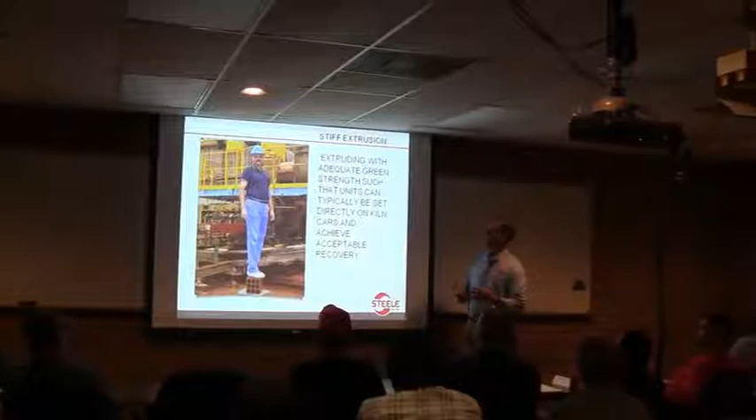So now, what are we doing? Really what Steele is known for is stiff extrusion. Let's talk about what that means. What we want to do is extrude a unit stiff enough that it has green strength, so we can set those brick directly on a kiln car. I want you to know the difference.

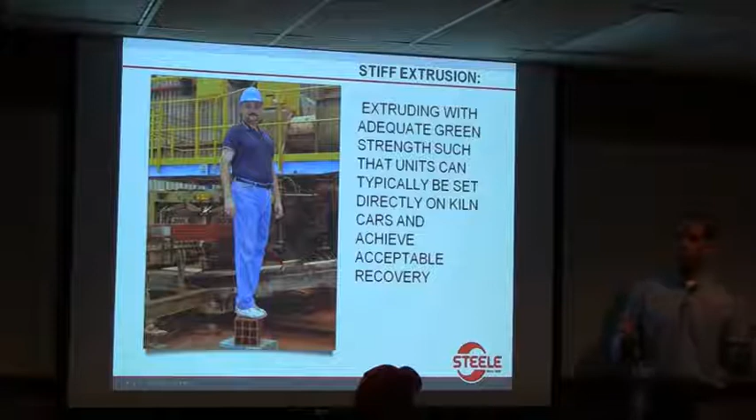Here's what it is: most of the plants in the U.S. and Australia are set up so you extrude a brick stiff enough that the units are strong enough to set directly on a kiln car, and you don't have to touch those brick again until they come out of the kiln and you're ready to package them.

Now let's talk about the other side. When we were talking about Sealy or the San Felipe plant, we're extruding softer—more water in the body—so those brick go onto rack cars and into rack dryers. They're not strong enough when extruded to set directly on a kiln car. So you don't stack them; you dry those brick first, get them dry, bring them back out, handle them a second time, and then stack them on a kiln car.

So our philosophy has always been, and it's been adopted by American and Australian brick manufacturers, that if the material will let you do it, stiff extrusion is the most efficient way to make a brick. We make a machine strong enough to let you do that—you've got to have power behind the machine to be able to do it.

This picture is a good illustration. This guy is about my size. That's from a customer in Saudi Arabia, and you can see the unit they're running—they're running a hollow block. That's how strong that block is right off the extruder. It's strong enough to hold him up.

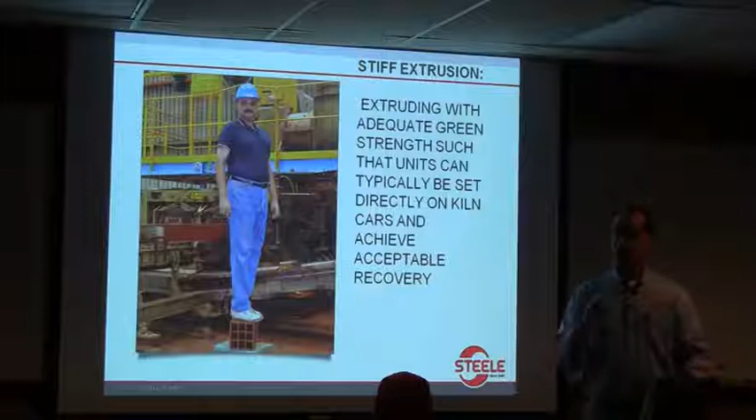As an extruder operator, in some ways you're operating a fine line. What we want to do is keep that brick stiff enough that it holds up on the kiln car and we're not cracking that bottom course. So we want it stiff enough. But on the other end, you don't want to get it so stiff in the brick machine that you're overamping the machine and locking everything up. There's a happy medium in running a brick machine—you don't want to be too soft, but you've got to watch how stiff you're getting it. So the extruder operator is trying to make sure the right amount of water is getting into that brick mix, and we're going to talk about that process.

But that's fundamentally what we're wanting to do at the extruder, and we'll talk about different aspects of that through the rest of the morning. This is simple—I always think of three things I want you to consider in the manufacturing process, because I really think you need all three.

One, you need the right machinery. If you don't have the right machinery, you're going to have problems from the beginning. But the second thing is you really need well-trained supervisors and operators.

If you've got folks that don't really know how to use what they've got, that's a problem too. I had an email from one of my guys last night. We've been working with a customer in another part of the country to solve a problem — they have variable frequency drives on their extruder, and nobody in the plant knew how to use them. So they had the right tools, just didn't have anybody there that really knew how to operate them. We'll talk about that later this morning too.

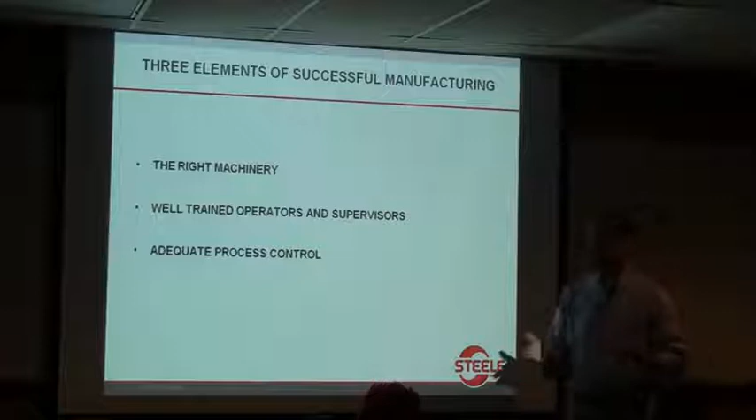And then the last thing is adequate process control. You've got to be able to control your process, and a lot of what we're going to talk about this morning is eliminating variables. If we can take variables out of the process, then there are fewer and fewer things that we have to worry about. That's kind of the way we're going to approach this.

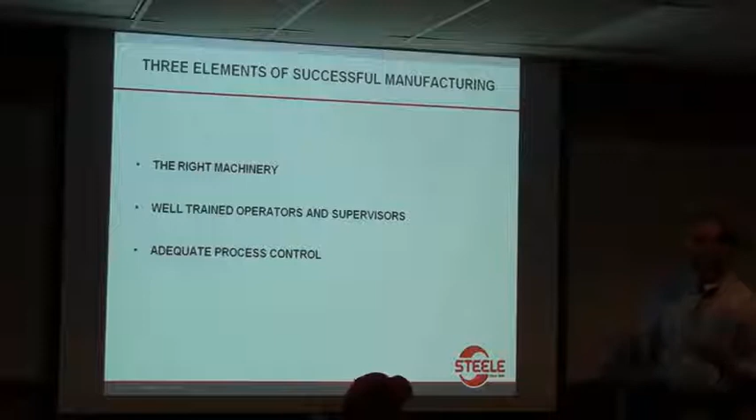I think on the next slide I've got an outline. Yeah, so this is roughly what we're going to go through this morning. I don't know about you, but I'm typically good for about an hour or so of seat time. So we'll get to a point here, and we'll take a quick break, just 10 minutes to get up and stretch. We'll go about an hour into this, take a break and stretch, then we'll come back in and kind of see if we can do the rest of the morning.

I won't read through all of those, but we're really going to step through each one. Probably on the front end we'll cover less, and as we get into the back end of the presentation we'll spend more time, because those are things you can impact in the plant and in running a brick machine. But there's our basic outline.

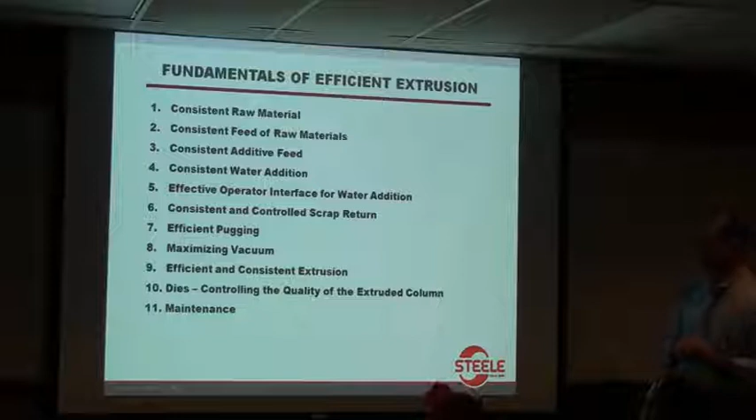All right, so this one we're going to talk just a little bit about raw material. You know how a brick plant works, right? The guys in the mill room say, well, if the raw material's not right, I can't do anything with it. And the kiln supervisor says, well, if you didn't make them right, I can't do anything with them. So it takes everybody doing their job — everything really needs to work throughout the whole process.

Clemson does a lot of research and teaches classes similar to this, and I'll tell you what they say — as a general rule of thumb, you need a third sand, a third silt, and a third clay. That's a general rule of thumb; you don't have to have exactly a third clay. Raw materials are going to vary a little bit. I think we were in a plant yesterday, and they said they were running about 21% clay, and some plants might run twice that.

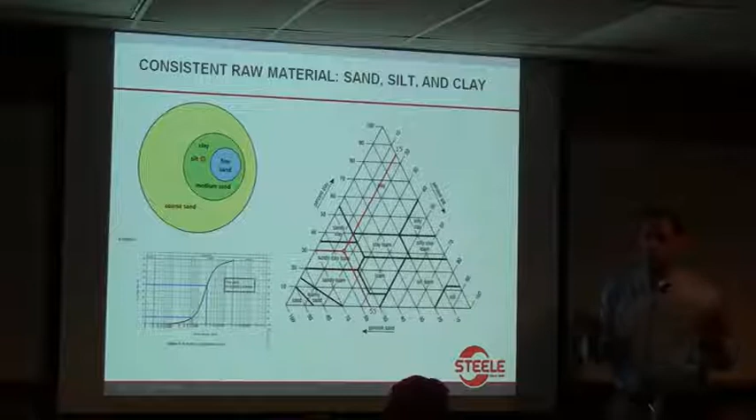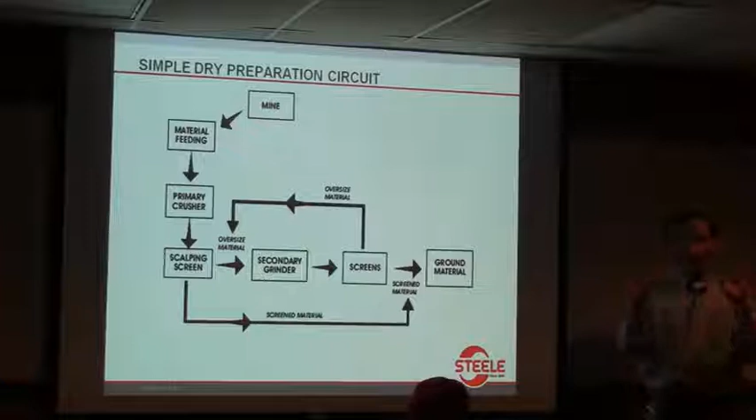Dry preparation is really when we talk about screening raw material. So what passes through the screens is what we're going to use to make a brick. In Sealy, you've got a smooth roll crusher, and the gap between those two rolls determines the size of the clay that's going to eventually go to the brick machine. So it's just done a little bit different.

Where you've got a typically dry raw material, screening the material makes sense, and in 90+% of brick plants in the U.S., that's what you're going to see.

So let's say we go through the primary crusher. A lot of times you've got a scalping screen to where we're going to pull out some fine material up front. What doesn't pass through the scalping screen would go through a secondary grinder, and that may be a hammer mill or an impactor. I know we've got a hammer mill over here across the street at the Denton plant. It goes across the screen bank, and then what doesn't pass through the screens comes back around and gets passed through that hammer mill or secondary grinder a second time.

Here's what I want to tell you, especially if you're in maintenance or looking after grinding: this is a system, and a system needs to be balanced, so everything needs to work together. I'll tell you the number one sin out of grinding rooms. I ran a brick plant before going to work for Steele, and one of the things I'd do different if I had it to do over is I'd really look at this oversized material that's coming back off my screen bank and going back into my secondary grinder or hammer mill again.

Here's why. If you don't have adequate screens, you've got a lot of fine material in this recirculating load, and that's a bad thing for two reasons. One, it's free—you've already put the work in to grind it, you're just not getting it out with your screens. So that system's out of balance for one reason or another. Not only is that free material you've already paid for, but when those fines come back around into that secondary grinder again, that's what really generates the wear and wears out everything inside on your wear parts.

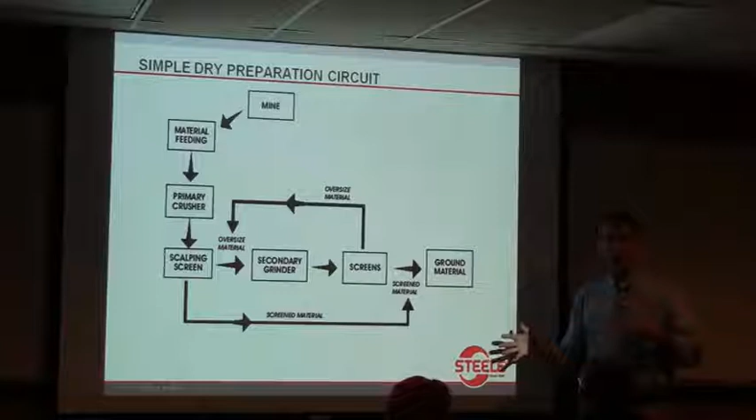So not only have you already paid for it once, it's costing you money to get it out. If there's one thing I would remind everybody, it's to take a sample off of your screen bank and see what's not passing through those screens. Are you getting all of those fines out? We had an engineer who used to say it ought to be 10% or less if you're really doing a good job. It's interesting—we had a customer in South America questioning us, and that's exactly what was happening. The machinery was doing its job, they just didn't have adequate screening to get those fines out of that circuit. Okay, simple point.

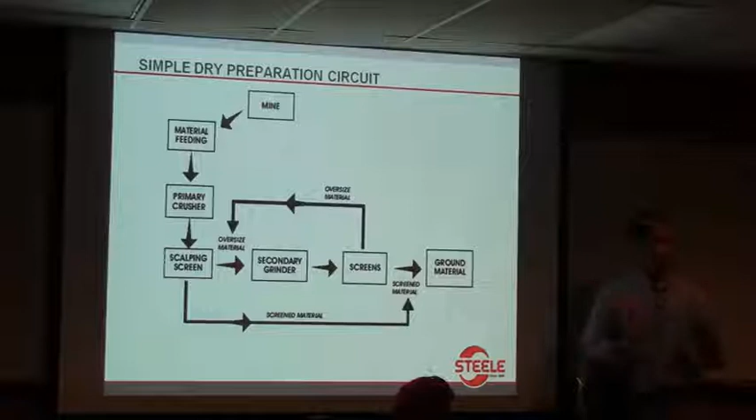Now let's roll on and we'll start talking about making a brick machine. So just in summary, we've talked about a consistent particle size distribution, and then we talked about sand, silt, and clay—we need all of those. And then the last one is a consistent moisture content.

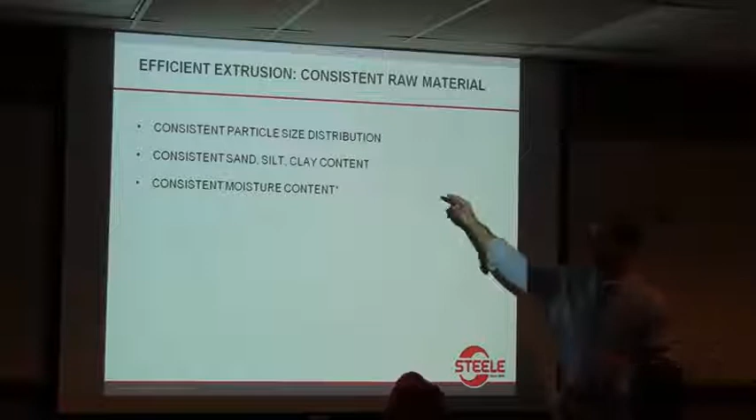Now then, here's the way I look at it. I know a lot of what goes on here is evaluating raw materials and quality control and putting up a stockpile. When you're stockpiling raw material—and Jim could add to this—I think you're trying to do two things. We really would like that raw material to be consistent, so we're putting it down in layers, cutting up through it with a front end loader or an excavator, so we should get a consistent blend.

But the second thing we're doing is really, you should be putting those stockpiles up when it's really dry. What we don't want to be doing is when it gets wet in the winter, having to fool around with wet material. That's how we can kind of ensure having something we can work with.

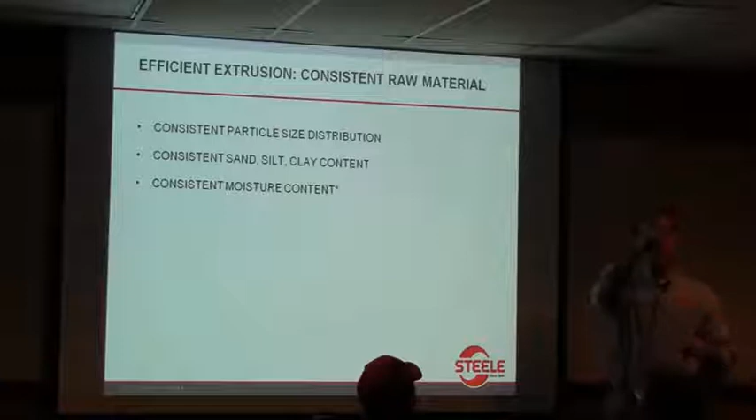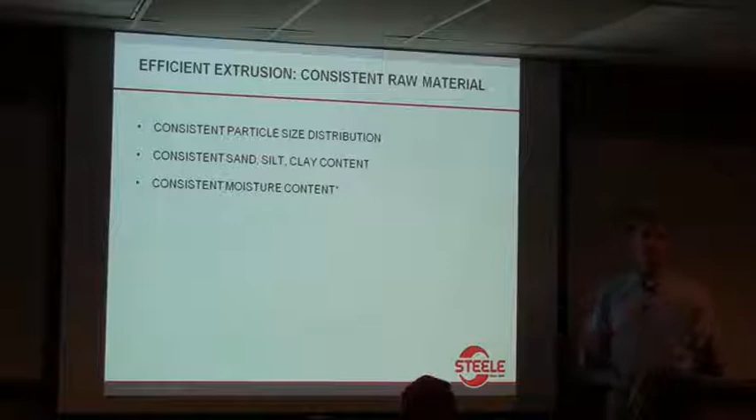And what we'd really like to have is a relatively consistent moisture content going to the brick machine. I think an operator can deal with some process variation, but what we don't want it to do is yo-yo up and down. We can handle subtle changes and respond to those, but if you've got wild variations, it's going to be a lot harder for an operator to maintain that consistent extruded moisture content.

Now then, consistent raw material and additive feed. And what did somebody say one time? If you really want something done, you've got to make it easy. I thought this was a pretty good illustration.

It's really simple, but I use this as an illustration. Before I got to the plant in Bessemer, we ran out of our grinding room into four clay tanks. At one time, if you wanted to change the feed rate out of the tanks, you had to trot down the hill and crank a hand gate open or closed, then go back up and see if you got it right. The plant manager before I got there put little rheostats and variable speed drives on there to speed up and slow down the belts pulling out of those tanks, making it really simple to control the raw material. But regardless, how about this?

Here's what I want you to know about a brick machine: what goes in is going to come out. You don't really accumulate it, it doesn't get stored anywhere. What goes in is going to come out, or it's going to get stuck in the middle and you'll be down for a big part of the day, and we don't want that to happen. So you've got to be able to control the amount of material going into that machine. We want it to be consistent and controllable for the operator.

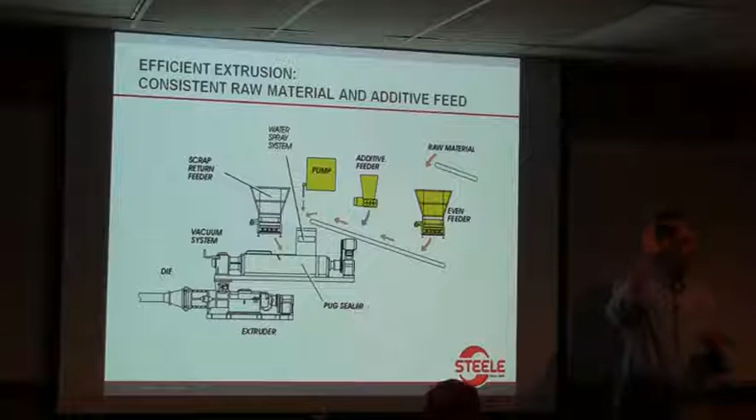The second thing I'm going to remind you of is if you are putting in an additive. Does anybody use additive A? Does that ring a bell? So if your plants are using additive A, that could even be if you're running an admix body, you could be putting manganese into a body. I know here at Denton, and maybe at Elgin too, you're making some commercial brick.

Well, let's think about that. We really ought to be putting that, whatever it is, in some relation to the amount of clay running through that body, and or the amount of clay running through that brick machine.

So if you're pumping in additive A, and you go to a product change, maybe from a king size to modulars - anybody run modulars out here? King size may run different from modulars, and Western Kings may run different from a utility. But if that extrusion rate changes, you need to go back and look at those additive addition rates and put those additives in proportion to the material running through that brick machine.

Now then, some plants have controls to where you can do that automatically, but it's simple enough. If it's additive A, you can run it into a 5-gallon or gallon container and see how long it takes. You can speed up and slow down that pump, but I want you to remember that you should be putting those things in proportion to the dry weight of material going into that brick machine. So if you're changing your extrusion rate for whatever reason, you really ought to be thinking about those additives as well, and you need some way to control them.

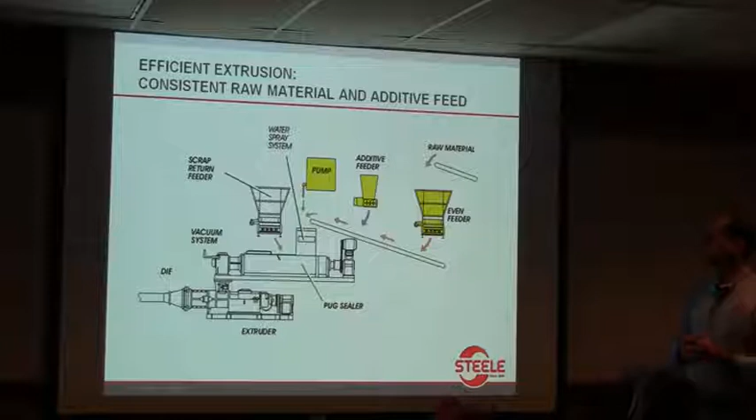Let's go to the... Yes, sir. Our QC guy is the one that adjusts additive A. He goes by the amount of cut that we get. If our cut rate is down, he'll adjust it accordingly, or if it goes up, he'll do it the same way.

Well, and that's a good point, let's talk about that. The cut rate should be okay if you're always running the same size product, because cut rate is really indicative of what's going in and what's coming out of the machine. So I would say if you're always running the same size product, going off the cut rate should be okay.

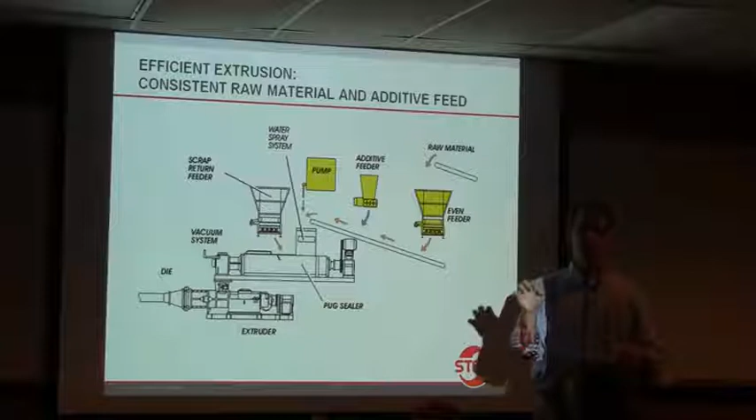But I would also say that if you're running 12 cuts a minute on a utility and you're running 12 cuts a minute on a modular brick, well, that's two different amounts of clay going through that brick machine. So it's not necessarily the same in that regard. I think he's pretty close, but you got to be careful to always think 12 cuts a minute on one size brick might not be the same as 12 cuts a minute on a different size.

We have a line that runs the modular, whereas the line that I'm used to running or working with is just commercial. It's different sizes and everything, and different caps on it, which causes how many cuts per minute you get. So he'll adjust it accordingly.

I think it's good that he's checking it, but I would also think really what it ought to tie back into is that dry feed rate going into the brick machine is going to be more accurate. But he's using cut rate as kind of a surrogate measure to figure out what's coming through. But I'm glad you shared that, and that's how they do it.

All right, good. All right, let's talk about water addition. This is kind of a sketch out of our recommended way to add water to a brick machine.

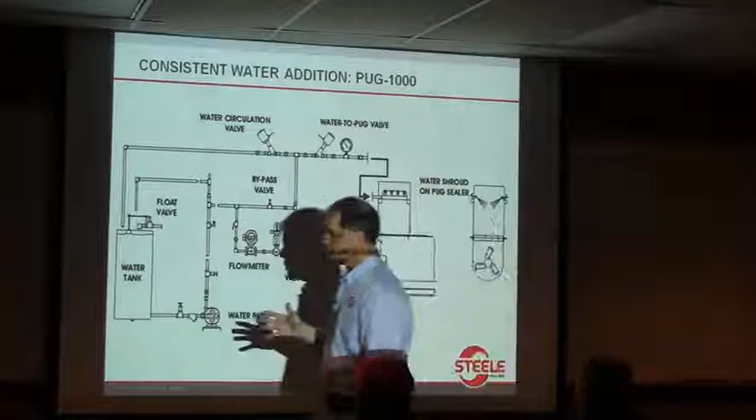So let's go back, and I want to explain how this works. Let's start with a water tank. You've got this water tank that's constantly being filled. You've got a water pump here. Water pump pumps water up, and overflow is going to come right back into the tank again.

And we're showing 2 air-actuated valves. Let's say that clutch is disengaged on the brick machine. This valve's closed, this one's open, so everything's just circulating back around. What we're also showing in here is a flow meter and a flow control valve.

There are lots of different ways to do this now. But really what this would do is, if you've got a flow meter and a flow control valve, an operator can say, I want to put in 10 gallons a minute. And that flow control valve will float in there until it dials in and lets you have exactly 10 gallons a minute. So the nice thing is you've got a relatively precise measure about how much water is going into the brick machine. Now, you don't necessarily have to do that.

All right, but let's talk about this. Once you engage the clutch on the brick machine, this valve is going to close, this valve is going to open, and so all your water is going to be flowing into the water shroud on the back of the machine. But let's go back here for a second. Why do we want to have a water tank?

True story, and I talked about learning things from customers and customers having problems. There was a brick plant in Atlanta, Georgia, and probably just like y'all, they'd start up at 6 o'clock in the morning. They'd get everything lined out and start setting brick, and it was not unusual that by 7 o'clock in the morning they'd either run the amps up and sheared a pin on the front of the brick machine, or had packed material into a die and were having to dig it out. Plant manager's thinking, well, he's going to get coffee and he isn't paying attention to what he's doing, a brick machine operator. But that wasn't the case. You know what was happening?

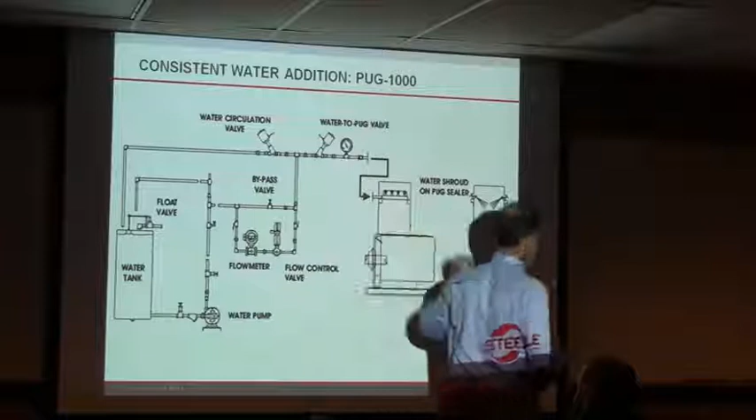Okay, so here's the other one. It's always nice to measure what you're doing. Let's go back on the other side. You see that pressure gauge right there? Not everybody uses that, but I'm going to give you a number where we'd like to see the water pressure in that line going to those spray nozzles: 40 psi. And why 40 psi?

Now let's think about what we're doing. In a short amount of time, we want to get a water particle in contact with a clay particle, and we want to do that job consistently. That's what we're doing in the pug mill, mixing water and clay and getting those two in contact with each other. We want to do the best job we can in that limited time between the material falling into the back of the pug sealer and the time it comes out front.

So one way we can do that is if we're running 40 psi, we get a good atomized spray back there, fine little water droplets. A lot of times, I go into brick plants and it looks like a little boy's peeing in the back of the tub. It may work, but that's not near as good. If you've got a good atomized spray, a good fine spray mist, and if you can keep 40 psi back here, then you can do it.

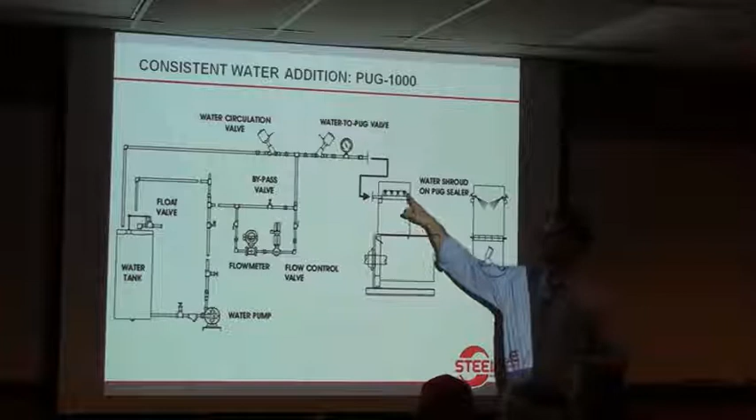Well, how do I do that? I might need to put in X amount of water—maybe 6 gallons a minute, maybe 14 gallons a minute. But what you can really do is change the spray nozzles in that water shroud. We've got half gallon, 1 gallon, 2 gallon, 4 gallon, 7 gallon a minute nozzles, and typically there are 8 of these valves back here. You've got a lot of control.

Let's say you get it set up and then it gets wet and you don't need to put in much water. As an operator, you can come back here, and what you should be able to do is cut off a couple of these and still put in the water you need, but keep that good atomized spray.

It's funny, my brother was the first one—he always said, read the book, and that's what the book says, 40 psi. It may be hard to do in practice, but that would be something to strive for: see if you can run that and get 40 psi as a back pressure on those spray nozzles with the water entering the water shroud.

I may have this in another slide, but I see it here, so I'll mention it. There's a little piece of angle iron back here at the back, and there's a reason it's there. For all the maintenance men, what we're trying to do is keep water off that back seal. That's a grease purge seal—when we grease it, we're purging grease into the tub, but what we're trying to do is keep dirt out. That little piece of angle iron back there is trying to keep dirt off that rear seal.

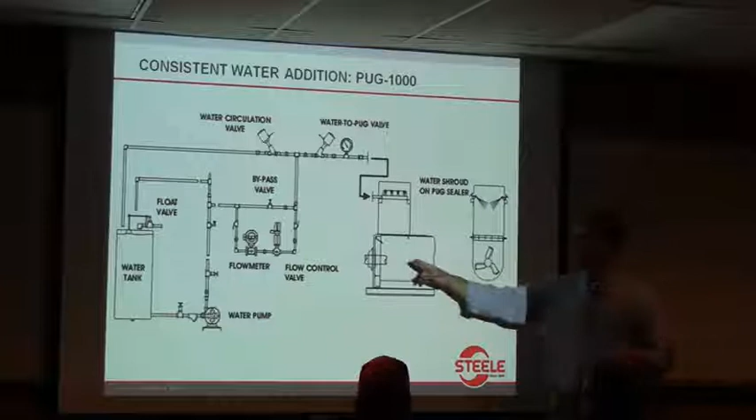If you ever go into a brick plant and it looks like a little mud volcano at the back of a pug tub, that's what's happened—you've either lost that rear seal or you haven't been greasing it, and water and mud are working their way out of that back seal. A lot of times maintenance guys think it just makes it harder to change that rear knife, which, by the way, wears faster than some others. We'll talk about the job of that rear knife in a bit, but there's a reason that angle iron's in there. A lot of times you'll see them cut out, but it's trying to keep dirt and water off that rear seal.

George, before you advance that, does anyone, I can't remember if any of the Acme plants, do you have any of the plants have pug masters or an automatic water control system? Okay, let's talk about that for a second.

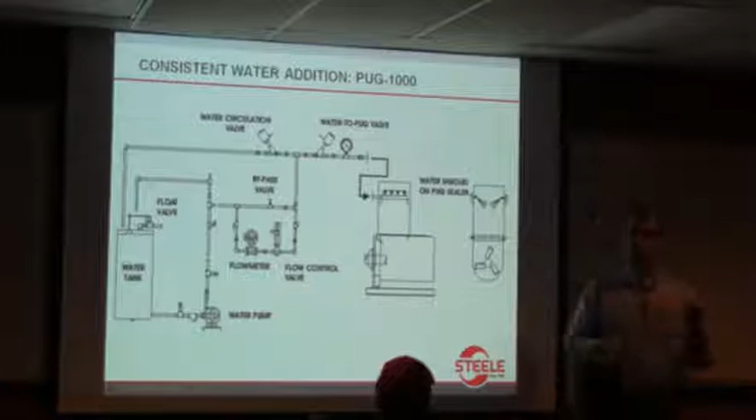So this is kind of a middle of the road system in a way. All it's doing is telling an operator, if you've got a flow control valve and a flow meter, exactly how many gallons a minute he's putting in. But he's got to figure out how many gallons an hour is right, and is my raw material changing, and how does all of that work?

The really nice systems today are automatic moisture control systems. How they work is you've got two things on the feed belt coming up to the brick machine: a moisture transmitter, which is reading the moisture content of the raw material, and a belt scale. Those systems do a calculation with a set point, figuring out the moisture content and dry feed rate, and they'll automatically control the valve to add the right amount of water at the right time as that material's falling in the back of the pug mill.

If everything works, the goal is, let's say I want to extrude a clay column at 17.5% moisture. You can set the system at 17.5, and even if the incoming moisture content or dry weight varies a little bit, that system automatically controls the water addition. Some folks have them and love them and run them in nothing but automatic. We'll go into some plants and they say, you know what, I just don't trust it, we've never been able to really get it to control right.

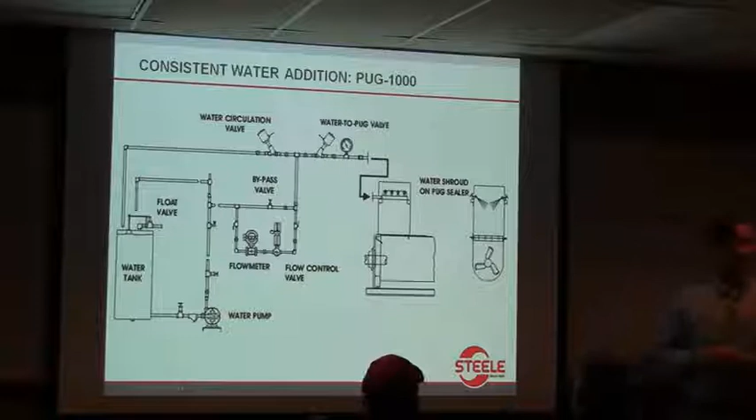But anyway, we'll leave it at that. Let's go to the next slide and see what we got on there.

So I did have one in there where we talked about that spray shield in the back. When we build a new machine, we've got a piece of skirt rubber on the front side of that water shroud. We talked about that atomized spray mist, and we want to keep that contained - we don't want it floating across the plant. There's a piece of skirt rubber there, but a lot of times you go into a brick plant and that's missing, you don't see it.

It's a small thing, but let's talk about right from wrong. You see that material falling into the back of the pug mill, and it's going to create a sheet. When we're setting up a new machine, we want to know which direction the material is coming in, because we want those spray nozzles hitting each side of the sheet - the big flat side, not the skinny piece - so we can maximize contact between the clay and the water particles.

Every now and then you'll see folks move a brick machine or move a water shroud from one machine to another, and that's not right. That's the way it ought to be, the way it's shown in the diagram here. Now I think I've got another slide.

We're going to talk about the optimal level of material in a pug tub. George, let's go to the next one.

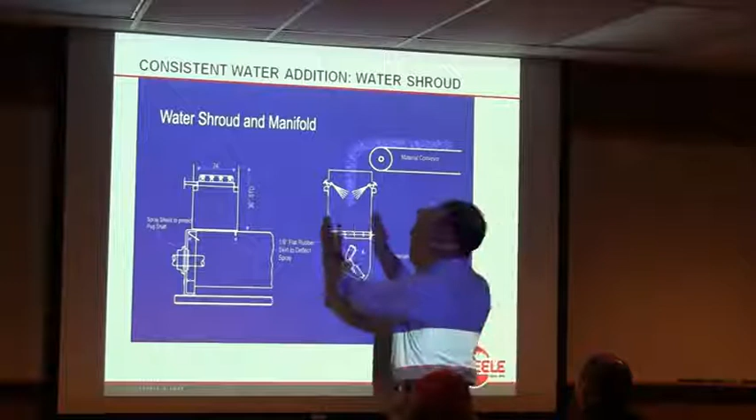Well, how about this? So what we've really got is there's a box on the back, and I think it's about 3 feet long, isn't that right, George? Typically what we're wanting to do is add all of that water at the back of the pug mill or the pug sealer, and then give it time. Let the knives and everything do its work to really pug that material, work that water and clay together, before it gets to the sealer auger.

Learning things from seeing people doing good things - one of the brick plants, we talked about this being the way it should work. Now we talked about getting in trouble or worried about it getting too dry on you and your amps going up. I saw one brick plant where they had literally a foot valve, and they had a spray bar across the length of the tub, running front to back.

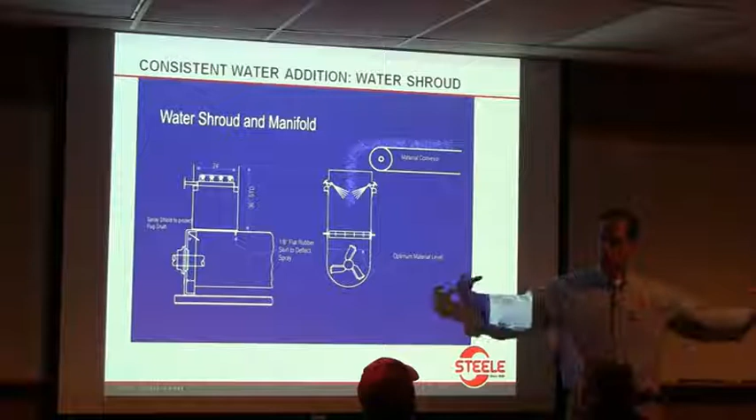So if the amps started going up, rather than taking a hose and wetting it down, they had a spray bar that ran the length of the tub, and he could hit that foot valve and automatically get water dumped across the length of the tub. I thought that was a really effective kind of emergency water addition. That was pretty nice. I trust you guys as operators to tell me whether that'd be good or bad. Normally what we want to do is get the water in early and let it work in, but when you're trying to keep material from getting too dry before it gets down to the extruder, I thought that was a pretty good way to put it in.

So how would that show in the finalized product? Would that start creating weird cracking? I don't know that it would. I don't know that it would. And it would be a hard one to diagnose.

Let me go to an extreme - if you're making tile, and you've got a dry particle in a floor tile or a roof tile, it'll create a flaw in it. Now making a face brick is typically a little bit more forgiving, but that's what can happen. They're more sensitive to those little dry particles when you're making something like a tile than necessarily a brick. But it might be hard to look back and say, okay, that's a crack or that's a flaw because I didn't get my water mixed in as well as I should.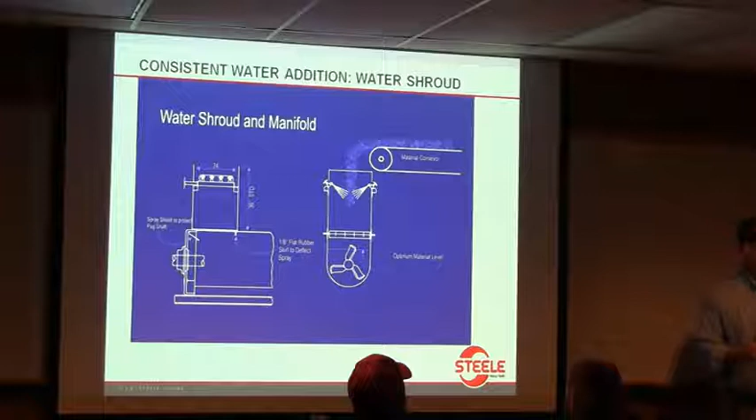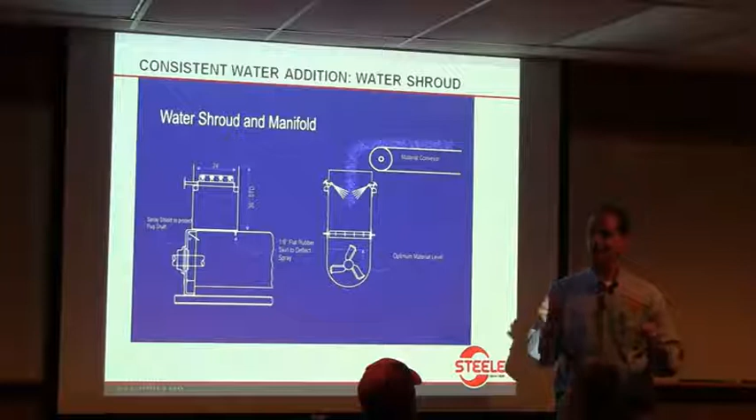Okay, let me mention something else. So I said to read the book, and here's the practical side too. If you have to start using those tiny little spray nozzles, down to a half gallon, those little orifices or holes get awful small. So if you get any trash in your water supply, you can plug those little nozzles up quicker. When you get into the bigger ones, like 4 gallons a minute, or 2, 4 or 7, that's not as much of an issue, but you can still clog those up with trash in the water. So I'll just tell you, there's the flip side of it. But we would like a good atomized spray.

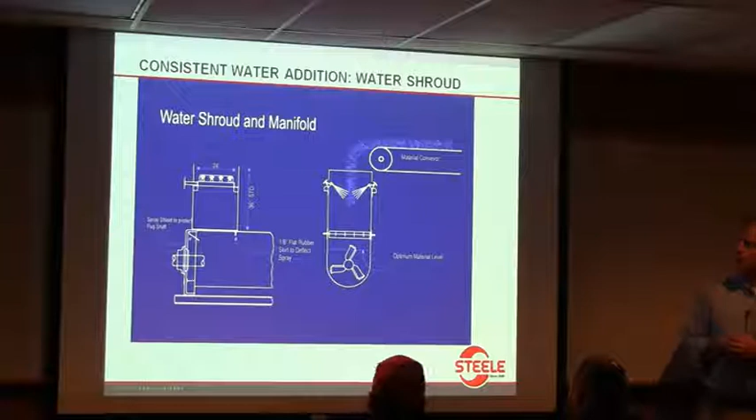All right, we're going to come back. Let's talk about scrap return, and this is a little tricky. Let me tell you what we like to see and like to do with scrap return. So I'll give this example. A lot of folks, let's just say you have scrap coming off of the setting machine or scrap circulating back around, and if you don't have a scrap return feeder, here's what happens. Let's see if we can use some simple numbers. See if you can follow me on this.

All right, let's just say we've got 50 tons an hour coming out of the front of the brick machine and everybody's happy. Maybe we're trimming off some waste there, doing a wire cut, and we've got the ends of the slug coming back around. Let's call that 5 tons an hour. So 45 tons an hour are going onto the kiln car and 5 tons an hour are circulating back around, and I've got 45 tons an hour coming up from my ground clay storage. So 5 tons recirculating, 45 tons coming up from ground clay storage, which is the same thing going onto the kiln car. So everything's balanced and everybody's happy, right?

Then I get a rock hung in a wire, and I've got 6 slugs on the belt before we realize it. The guys down at the setting machine wave their hand and flag it, so I walk down, take my screwdriver, and get it out. Now I've got 6 slugs on the belt. We're good brick makers, they're not going on the kiln car, so we're going to run them back around. So now then, if I don't make any other adjustments, rather than having 5 tons an hour coming back around, for a short window I've got 50 tons an hour of material coming back around on my return belt, and I've got 45 tons an hour coming up from the mill room. So rather than having just 50 tons an hour flowing through that brick machine, I've got about 95.

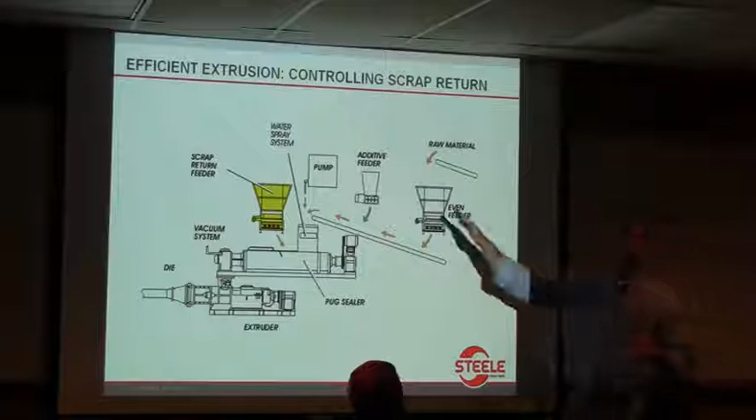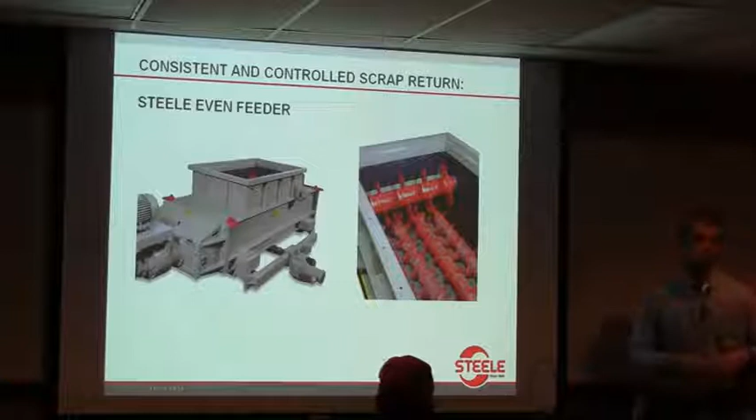I think I've got a slide in here - that's what we call an even feeder. You've got a live bottom feeder, which means you've got rotating shafts in the bottom, and a cross shaft up front to chop up those brick bats or pieces of slugs going back in, and just meter those back in. This one's even got a retractable floor in it, and some plants making commercial or architectural brick like those, because you can clean everything out - pull the floor back and clean everything out when you're done. But again, it's about controlling scrap. All right, let's go to the next one, George.

Okay, now then, we're working our way through. This is a good graphic, and one of those things I'd like you to remember today, if you don't remember anything else: there is a correct level in the pug sealer, all right? What we'd really like to see is that image shown on the left-hand side of that slide, where when that knife swings over to about 12 o'clock, we'd like to see about 4 inches of the top of that knife when it swings over. And we'd also like to see a good consistent level in that pug tub from the front to the back.

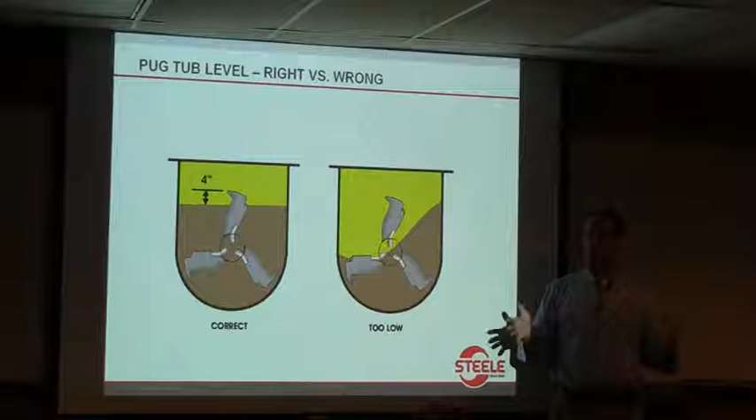Speed not too quick. Well, how about this - and you're close, I'll give you partial credit for that one. What really happens is that pug shaft - we could also say the pug shaft's turning too fast for the amount of material in it. I want to talk about variable speed drives a little bit and what they'd let you do. Maybe we talked about making different sizes, and if you always run your pug sealer at a consistent speed, you can't really change the speed of the pug shaft, and then we've got to change the amount of material coming into the brick machine because of how fast we can set brick on a kiln car. So we may not have any choice.

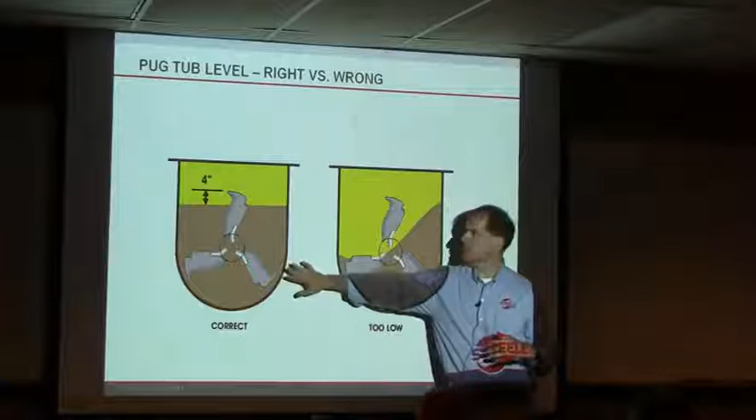But now you've got more and more plants putting in variable speed drives, and what that lets you do is speed up or slow down that pug shaft to where what we'd like to be able to see is that condition on the left-hand side all the time. And I would just tell you, if you always run like this, that's a problem - we don't really want to see a pug tub starved like that.

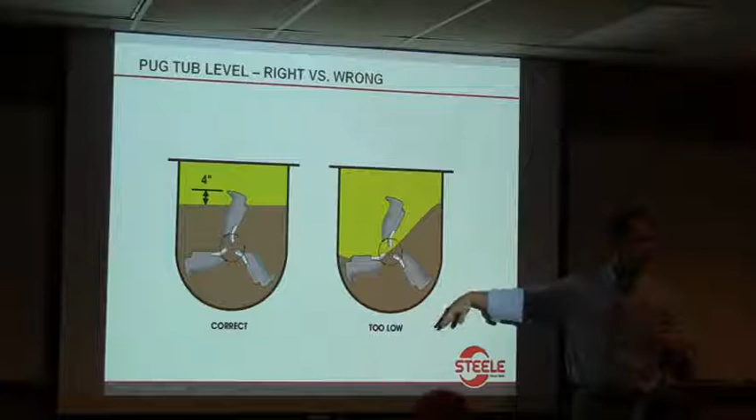We talked about mixing water and clay, and we'd like to take advantage of that residence time. When you have this much material in there, it's going to spend more time in there, and there's more opportunity for that to pug the water and clay together. But I'll also tell you, every now and then, if you run like this, you can actually lose your vacuum seal at the sealing augers. You can hear it - it almost sounds like a brick machine burping a little bit. It makes a bit of a noise, and to me, that's a hard problem to track down, because you're losing vacuum, and that impacts the quality of brick.

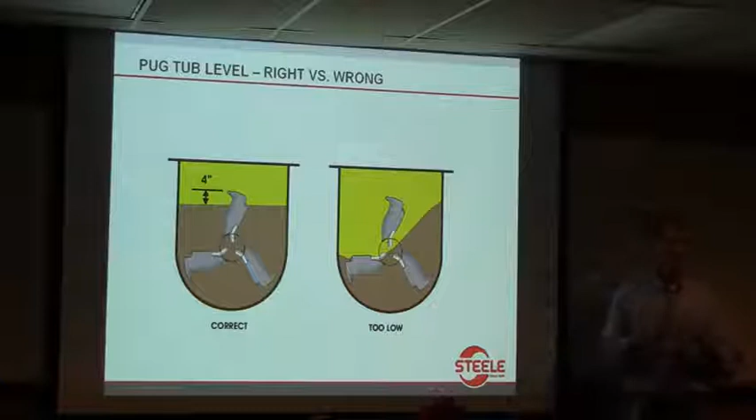But if you run it like this, it could come and go, and that's not what you want to do. We want to see that image over on the left-hand side.

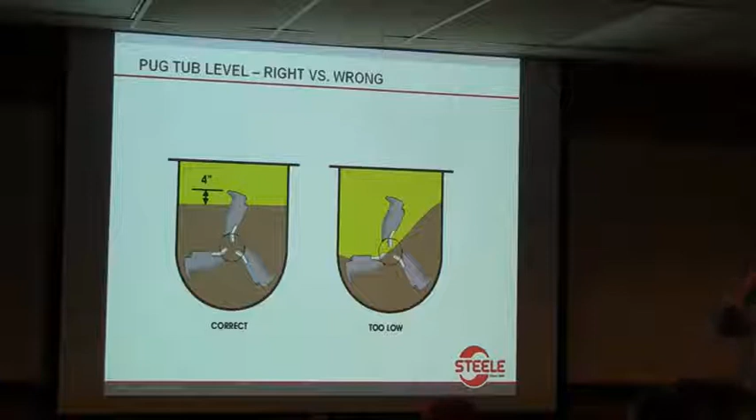Let's go to the next slide. I think I've got a shot out of a plant here. That's actually a good-looking pug tub, and my guess is that's an Acme plant. I think that picture was taken in an Acme plant.

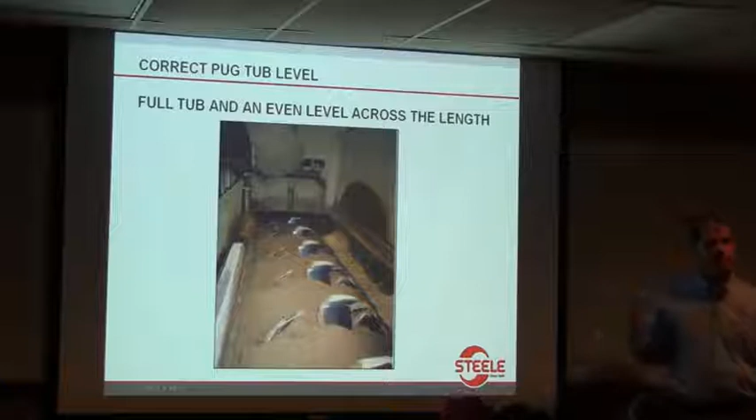But if you look at that, there are a couple things. You can see what it looks like as that knife is coming over at 12 o'clock. And then the other thing is the level of material through that pug tub is pretty level from the back all the way up to the front. That's a good thing too, and that's what we want to see.

It's interesting, single shaft pug mill, but I love walking in there, and you can literally at times see material just looking like it's walking its way up towards the front. When you got everything right, it works, and it works well.

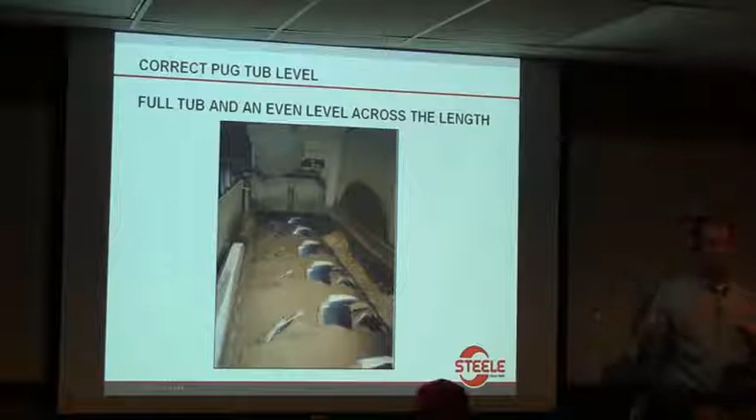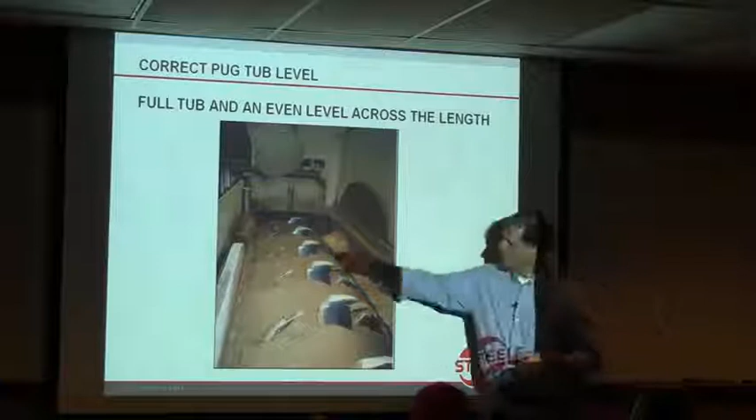For the maintenance guys, I don't know if you're responsible for changing pug knives or not, but let me tell you one thing. If you're changing pug knives and you're not going to change them all at the same time, what we encourage you to do is go in and change them in a row. Don't go into the back and change 12 in the back and then go to the middle section and change 12. It'll change the flow characteristics of the material in that pug tub.

What we'd really like to do is change them all in a row and then go change another row, and you can avoid having that problem. But that's a good looking pug tub, and that's what we would really like to be able to see in all your plants, okay?

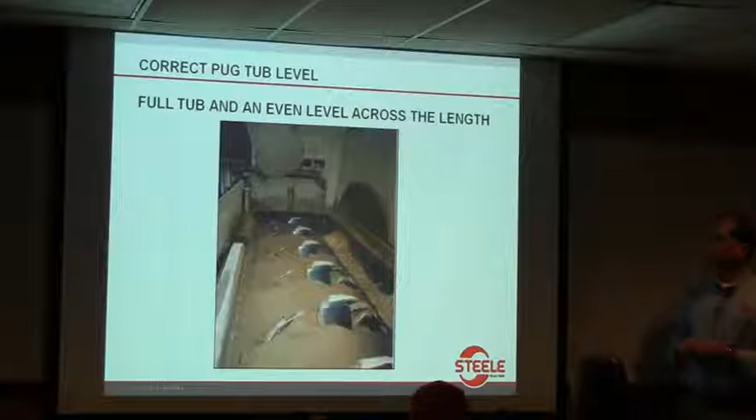All right, let's talk about installing a pug knife. This might be good for operators and the maintenance guys. I'll skip down. Well, let's talk about the pitch to begin with.

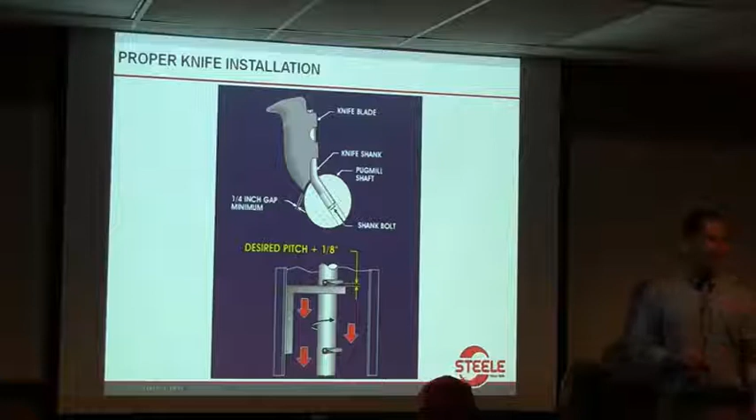And George, or anybody else, I don't know what you'd say - we'll say they are adjustable pitch. You could put more pitch on them to impact how that material flows through the pug tub. I think it's a tough way to do it, and I'd rather keep them relatively consistent unless you've got a compelling reason to change it. But a very subtle pitch on the pug knives to begin with.

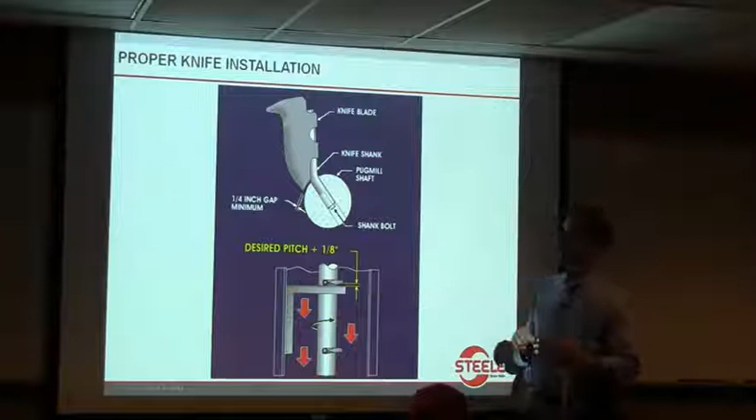The second thing that I want to talk about is when we put a pug knife in, we should have a 1/4 inch gap between the blade and the shaft. Okay, and here's the reason for that.

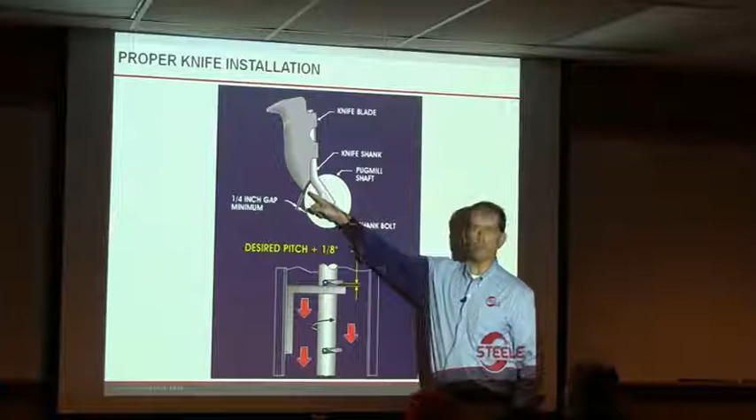If you set that blade all the way down on the pug shaft and you don't have that gap, and you tighten everything up, what we run the chance of doing is putting that shank in tension. And if we put that shank in tension, by the time it cycles in that tub enough, you could break one of those shanks. So you really want to wind up having just a little bit of a gap between the pug shaft and that blade in operation.

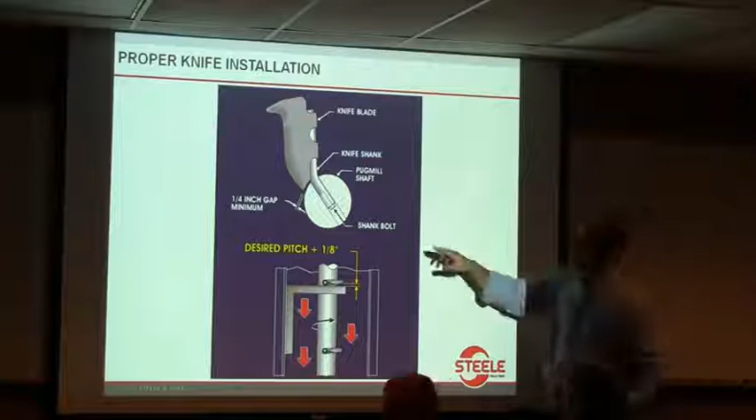Let's talk about, if you don't know, how those knives are actually held in. What's shown here is an aluminum bushing, a tapered aluminum bushing. And then what we've also got is a bolt that goes in the end and a washer underneath it. What happens is you tighten this bolt, you flare that aluminum bushing, and it locks everything together. So that's the way they're held in place.

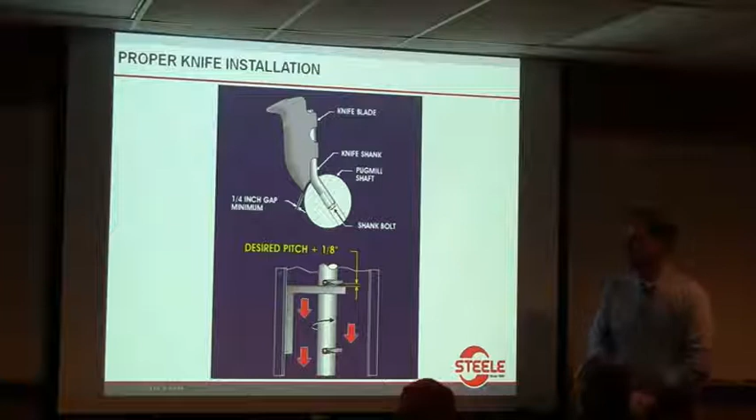Now then, I think let's go to the next slide. Let's see how my timing is here - yeah, not too bad. So now then, there are a couple things that I'll tell you. Let's talk about installation. If you ever have to replace a pug shank or put one in, there are a couple things I'll tell you.

Always put never-seize (anti-seize) on the shank itself, and between the shank and the aluminum bushing, put never-seize on them, okay?

I work for Steele, and I'll tell you what I think is probably one of the most hateful things about our machines: if you get a shank that's been in there for a while, they are not easy to get out. Honestly, even for us, we continue to look at better ways to be able to get those out. But it can be a bad job.

Let me tell you a couple things that may help you, in addition to always using anti-seize or never-seize when you're installing them and being generous doing it.

You remember we talked about that aluminum bushing, and that aluminum bushing locks the shank in place when it flares out. When we go to take one out, let's say we take that bolt out of the end, the last thing we want to do is hit on that aluminum bushing and flare it out. What we need to do is separate that shank from the aluminum bushing.

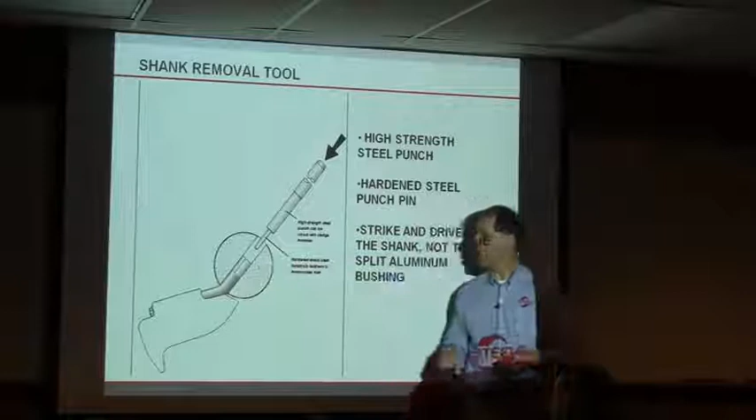So what we've got is a tool with a hardened punch pin that goes into that threaded hole, and then a high strength steel punch that you can actually drive them with. We do make a shank removal tool, and it works pretty good. It does not always work.

I talked about us getting better from learning from everybody running our machines, and I think this came from one of the Spences. Was this John? You know what I'm getting ready to say with the hole saw, right? Yeah, I tried it, I was the one trying it. Oh, is that right, no kidding. And it works, some of them. Some of them, okay, well, and so here's what they came up with.

So you've got a steel shank, which is pretty hard, but that aluminum bushing is a softer metal. What they came up with is using the way a hole saw works. You put an attachment on there, and in some instances, you can drill out the aluminum bushing. If you can drill out that aluminum bushing, it'll free those shanks to come up. But that was actually one of your plants that came up with that.

I'm glad, I couldn't remember who, so y'all did that then. But that's a good idea, and that isn't something that started with us. But I will say, so how about this?

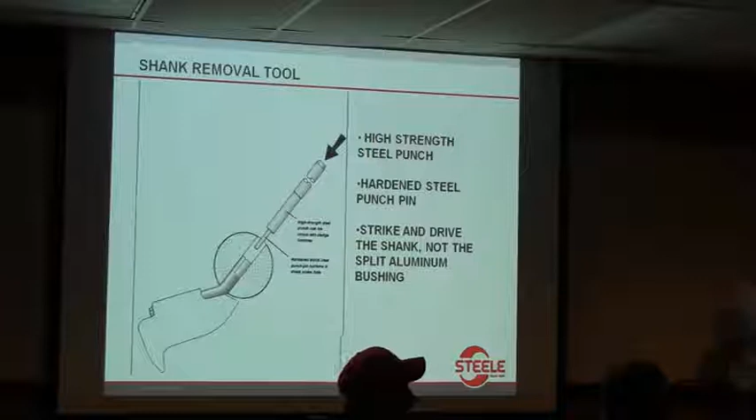Robert mentioned, speaking of drilling out the bushings, if you're interested in seeing it and can't picture it in your mind, there's a video on YouTube. Yeah, that's right, it actually tells you what size hole saw they're using. I've looked at it several times and shown it to people. If you type in 'JC Steele Shank Removal' on YouTube, you'll get the video. It's not real long, but it'll give you a good visual of what they're doing with that. I'd forgotten we made a little video clip of that. Thanks for that reminder, okay.

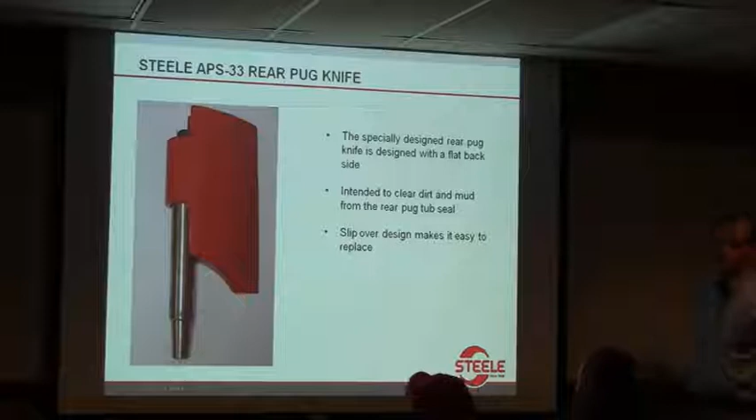So we talked about the angle iron in the back, and that we want to keep water and dirt off of that rear seal.

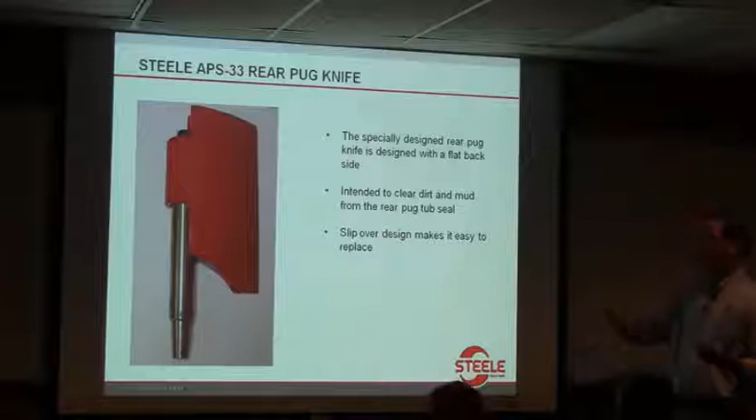The knife in the back of the tub is different from the rest of them. It's got a flat side on the back, and you pitch it differently. We want it to sweep material off of that rear bulkhead and rear seal in the back of the tub. Again, we want to purge that thing with grease, and keep water and dirt away from it to keep that seal in there.

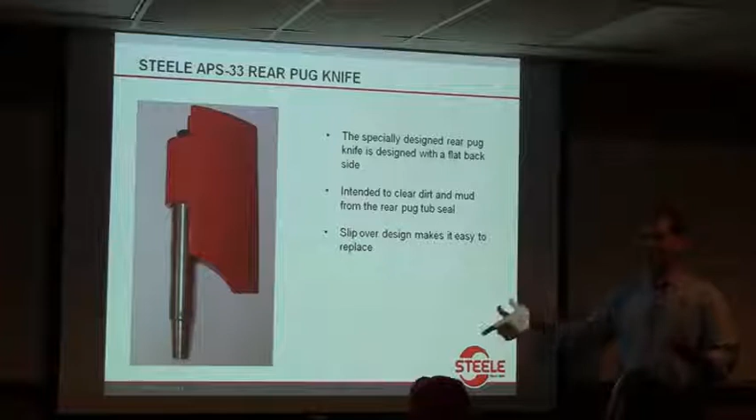From a maintenance standpoint, this one is out of sight, out of mind, hard to get to, but it's probably one you need to keep a good eye on. So if you've got maintenance schedules, you certainly need to open up that water shroud in the back, and somebody needs to get in there and take a look at what that rear knife looks like. That one's going to wear as fast as any, and it's got an important purpose.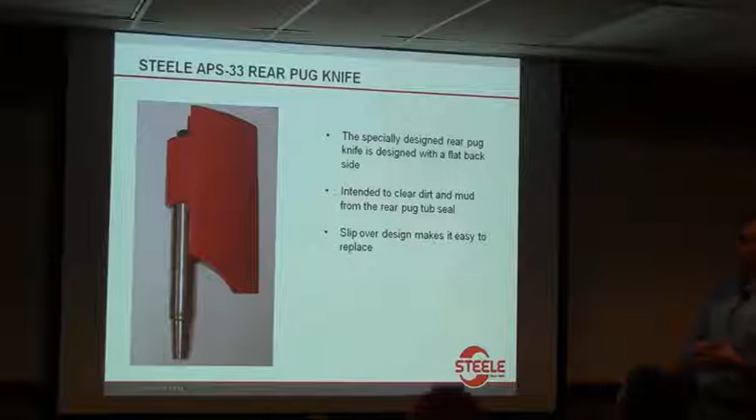We talked about the pitch of the knives in the tub, pitched back at just about 1/8 of an inch. That's true for all but the rear knife, which we just talked about, and the front knife. The front knife we really want to pitch differently.

As shown in the diagram here, we want to pitch that front knife to where it's really in line, or really feeds material into the rear wing of that sealant auger. It's going to help funnel material into the sealant auger, so it's pitched a little bit different than the rest of these behind it.

I will also tell you it is possible to install sealant augers 180 degrees out from that knife. You should have a knife that's going to line up to where it's feeding that rear wing of the sealant auger.

Every now and then you'll see some plants where something happened as they were changing augers, and the sealant augers didn't go back in the way they came out. You'll see these flipped over 180 degrees where you don't have that front knife able to provide a leading, feeding edge to the sealant auger. I'll point that out, just one of those little things to keep an eye on.

What I noticed is the pug mill, when the augers start to go out, it starts to build up in the front. The rest of the pug is, like you say, a good level. Yeah, when it gets to the front, it starts to build up. Could you adjust that front auger to cause it to go ahead and just keep? I don't know that there's any adjustment on it, any adjustment that you can make.

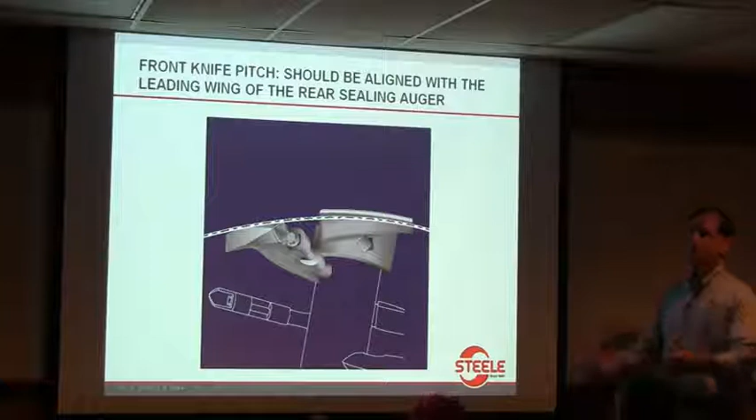What I would tell you is that when you start to see material backing up around that sealant auger case, you've got sealant augers that are probably worn out and need to be replaced. There's no real adjustment in there or any way to fix it. You've just got worn sealant augers, or likely have worn sealant augers.

We can talk about one more thing in that sealant auger case, but that's indicative of what's happening. That's another thing that you can walk into, walk up on the platform of a brick machine, and if you see that material kind of rolling back and piling up, it's time to change sealant augers. That's really the answer to that one.

All right, now we've walked all our way up to the front of the brick machine, so here's kind of a cross section of it. Let's talk about what we've got.

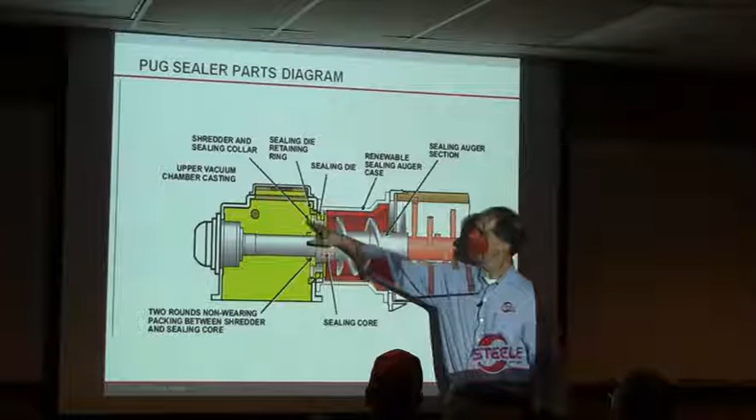You've got a rear sealant auger, and we talked about that knife feeding it, a front sealant auger, a sealing core, and then you've got a shredder here. You've got a shredder and a sealing die. The sealing die is a wear component, but we make those in different sizes.

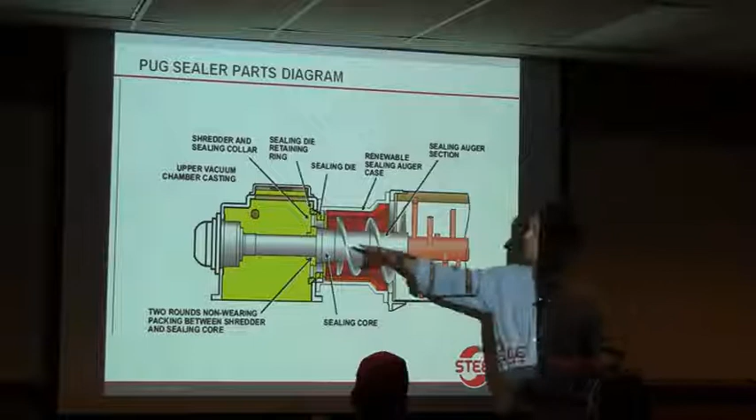What we really want to do is size those to where we match them to the speed of the machine, to where we're able to create a good vacuum seal. The shredder in the front is just shredding up that clay before it falls down on the augers in the brick machine. If we didn't have the shredder in there, we'd essentially just be extruding a pipe.

I want to come back to your question here in a second, but I want to mention this: one of the things that every now and then people forget or have trouble with is the way we've designed it, there are actually 2 rounds of non-wearing packing that go behind the shredder. Why do we have that packing in there? Does anybody know the answer to that?

Vacuum. Good answer, good answer. Okay, so think about this.

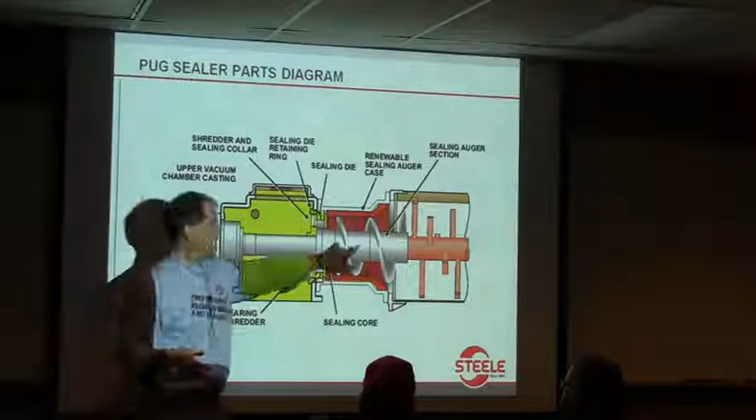So we talked about castings, and the sealant augers are castings, so they're a little rough. They're made out of 28 PC, which refers to 28% chrome. It's a high chrome alloy, so it's got really good wear characteristics, but at the same time you just about can't machine it. It's really hard, and it isn't practical to machine it. So you've got an as-cast part fitting over a shaft that's machined, with fairly tight dimensions.

The reason we put this packing back in here is that we're trying to draw vacuum. We want everything tight enough to form a vacuum seal, holding vacuum through the vacuum chamber up to where the product comes out of the front of the extruder. If we don't have this packing in here, you can actually draw vacuum through that little crack or fit between the OD of the auger shaft and the ID of the sealant augers. By putting this packing in here and greasing it up, we seal up that void and keep from having a vacuum leak along the shaft.

So really, Robert, I guess I knew this, but just looking at your diagram now, the actual vacuum seal, you want that to be taking place right at the sealing core. That's where you hold the vacuum. You can't really count on what's back in the augers to be making that seal. The augers are just compacting the material up to that point, and your seal is happening at the core.

That's right, I think that's right. Is there a recess on that front sealer so you can have some packing on the shaft as well in the earlier machine? Yeah, let me think. That might be a little... there's a gap in here to be able to fit that packing in now. I mean, there's an obvious place to put it in. Let's go, I think I've got another slide, George.

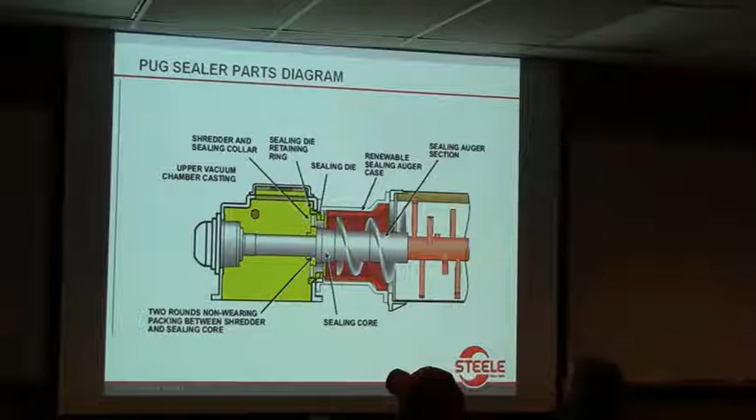So here's the other one I'll mention. You talked about the sealant augers and material backing up—is there any adjustment? Probably no adjustment, but let's think about it. What's happened is we've worn those sealant augers likely to where we're getting a gap, and the pressure is such that material wants to backfeed rather than move forward. So that gap is one or two things: the augers are worn, or you could be wearing the sealant auger case itself.

These have been around for a while, but it's always good to talk about. At one time we just had a ductile case. We talked a little about 28% chrome—pug knives, sealant augers, extrusion augers, liners, and a lot of times die bases are all made out of high chrome alloy, good wear characteristics, not easy to machine. Ductile, I can hit with a sledgehammer and probably won't be able to break it. That's how strong ductile is, but it doesn't have the same good wear characteristics.

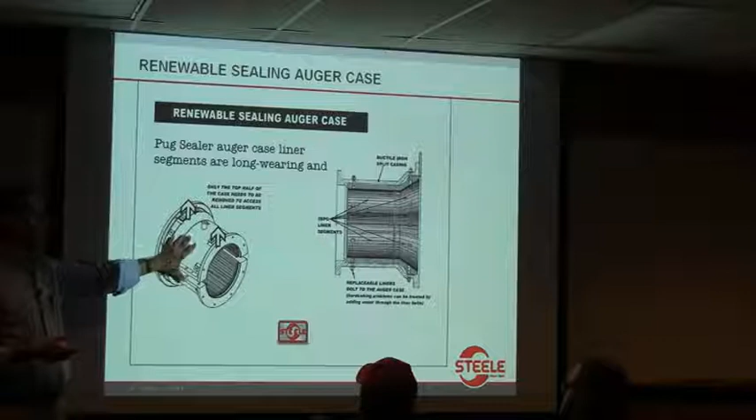So at one time we just had a ductile sealant auger case, and what we went back and did is change that to where it accepts a chrome liner. The liners are made to be replaced in there, and our line is this should be the last sealant auger case you ever buy—you just need to replace those liners. Not only is it lined, but those are chrome liners, and chrome will last a whole lot longer. So there are two things to keep an eye on: the sealant augers, and whether the case or the liners inside the case are worn.

It may not be, but you've got to think, there's a gap there. Is it the sealant augers or the liners? Could be either one. I'd like to think, George, do you know off the top of your head, does every Acme plant have a renewable sealant auger case now? We got one. We just replaced ours recently.

Well, it's just something to keep in mind. If you do have a ductile case, you really ought to go to something like this one, because it's a better value for the money in the long term by far.

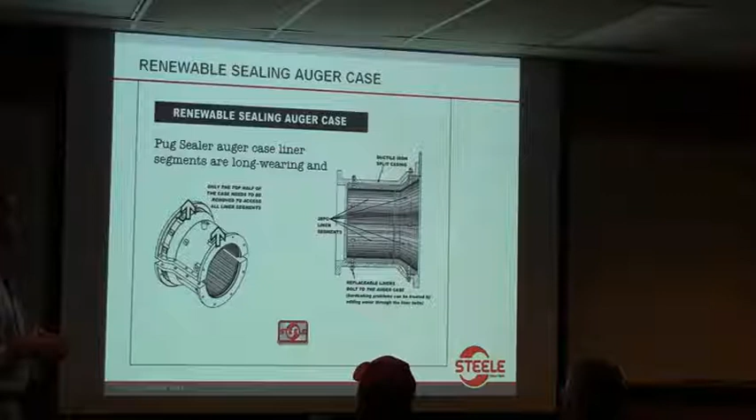Okay, let's see where we are. So we talked about the packing, and then the shredder and the packing that would go back behind it, or half of a shredder. And that's a chrome piece as well. Okay, what are we up to now?

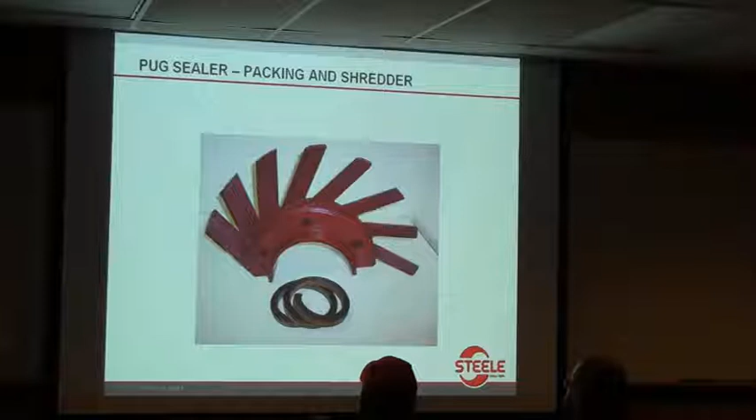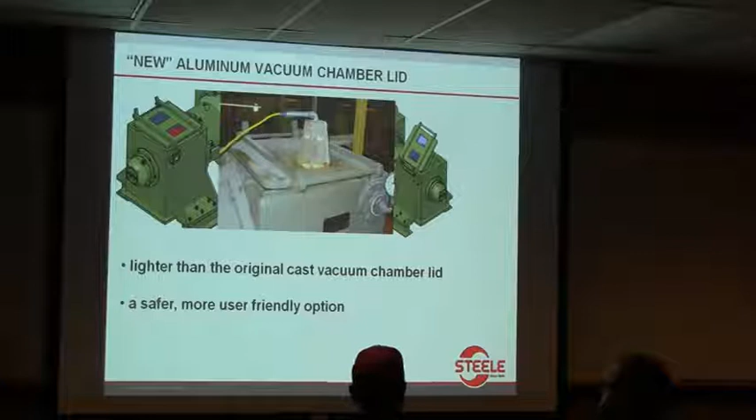Yeah, user friendly. And here's my knock on the ductile one we made: I like the ductile one, but there's not even a good lip on it to be able to get your fingers up underneath it. So honestly, looking back at our equipment, that's an opportunity for somebody to get hurt, and this is a better option, it's just lighter and easier to handle. So if you're an operator, you might like that. That's one thing we can do today, talk about some things that have come out.

Even though it's lighter and easier, will it still seal? Oh yeah, actually what we do on this one is machine a recess and fit a rubber gasket up on the inside, and it seals just fine. Well, the next question is, when you open it to clean it, will that gasket stay in? No, it stays in there. Oh good, that sounds like a real improvement. Yeah, it's a good thing.